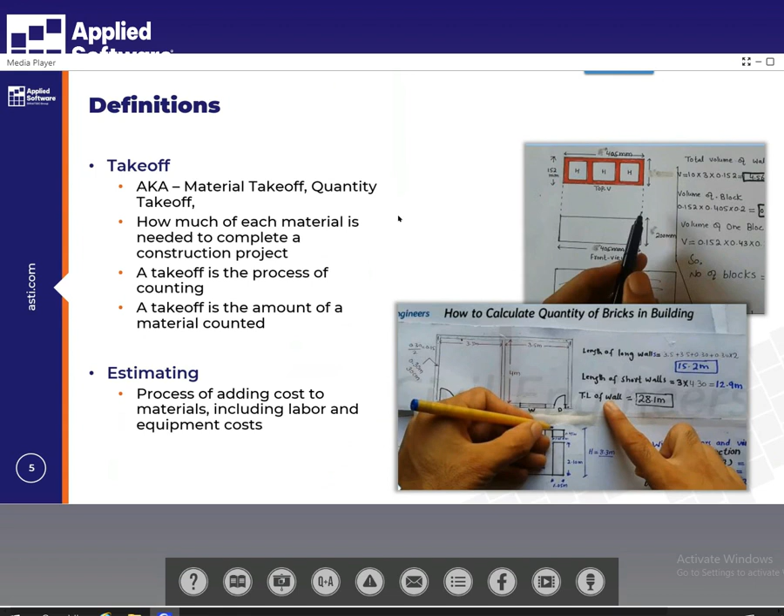But with Autodesk Takeoff, we are going to be quantifying materials. We are not doing estimates, but we'll be able to take that takeoff and export it out to generate an estimate outside of Autodesk Takeoff.

Who uses Takeoff? Typically, that's your estimators and your contractors. Now, for those teams that are using Revit models, they can get quantities out of Revit, but typically those are your designers and your engineers. They're not doing takeoffs per se.

The Autodesk Takeoff tool is made for estimators and contractors who don't know Revit or CAD, but they're receiving maybe construction documents, possibly even models. And without knowing Revit or CAD, they'll be able to use this tool to get some takeoffs.

Now, in history, the way we've done takeoffs is by hand on paper. We would receive a document and then highlight it with different color markers and highlighters to know what we've already counted. Today, we up it a little bit with PDF documents. With PDF documents, you can color up the PDF with different colored lines and shapes, just to let us know that we've counted the object.

With a model, that's where things start to separate a little bit. With the 3D model, we can actually generate a takeoff based on the objects that have been created in the model. Now, in a typical model of a building, you've got walls, windows, and doors. You've got the concrete pad. You've got the materials that make up the wall, the studs, the insulation, maybe plastic, vapor barrier.

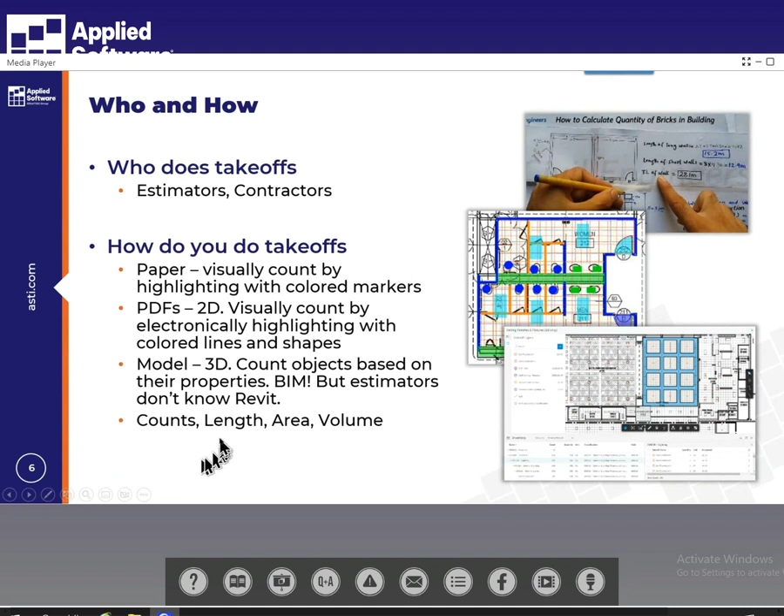If I have a wall and it's this long, but it's made up of metal stud and gypsum wall board, I can calculate just how much metal stud I need and how many gypsum wall panels I need. And so there's formulas to help us calculate that. And we can calculate counts, length, area, and volume, all from our models.

Now, I am going to talk about Takeoff. Takeoff is part of the Autodesk Construction Cloud. You can use Takeoff if you're an estimator or contractor, just for yourself. However, in the grand scheme of things, we want a project where the designers, the engineers, the pre-con, the construction teams are all part of the Autodesk Construction Cloud. And by doing that, it's easy for us to share information and collaborate back and forth.

And so one thing you'll notice here, these are the four main modules, if you will, of the Construction Cloud. We have document management, we have BIM Collaborate and BIM Collaborate Pro, Takeoff, and we have Build. And what you'll notice is that the Collaborate tools, Takeoff and Build, all have access to Docs.

So if the design team is working with Docs, they've had the models here or their CAD drawings. That's accessible by the designers, the pre-con teams. It's also accessible by the estimators. No need for emailing files back and forth. Setting up permissions and controlling how people access files. Estimators using Takeoff can access whatever files they're given permission to see to start doing takeoffs.

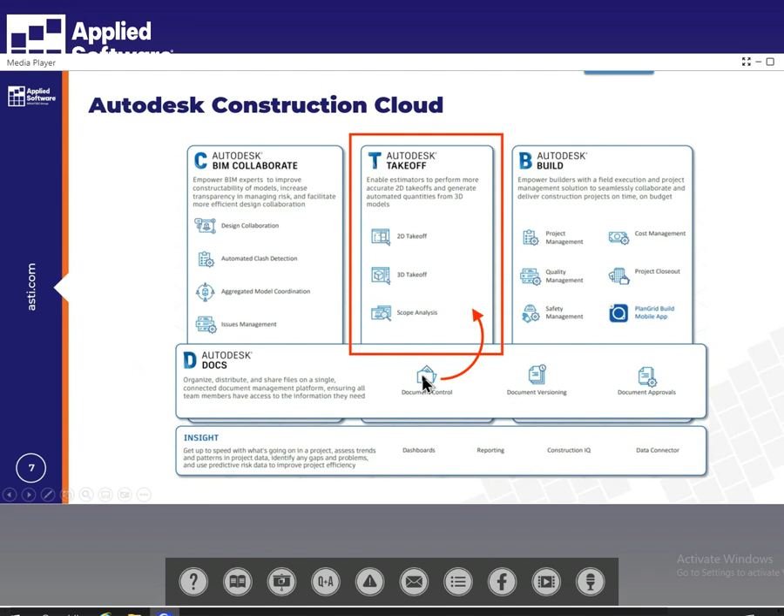So let's talk a little bit about project setup. There's really 8 main points for setting up a project to do takeoff. We're going to log into the Autodesk Construction Cloud. Then from there, we're going to create a project. We're going to invite members to the project. We'll control and we'll set up what people can see and what they can do in the project. Then we'll configure specific settings for Autodesk Takeoff.

Now, once we configure those settings, the next step is to get some drawings or some models to do takeoffs on them. So we can publish 2D files or we can publish a 3D model. And then once I get the files and the models up in the cloud, now I can start creating packages. So I'll create a package specifically for counting, maybe concrete for my structural foundation, my footings. Maybe I'll create a package for counting my electrical fixtures. So I can create a package to help organize what I decide to count.

So once I create my packages, I'll begin with quantity takeoff, and then once I finish counting everything I need to count, I can finish off by exporting out an inventory of everything I counted to a report or to an Excel file, which then can be used by any estimating program out there. So being able to export out to Excel will make it available to any estimating tool and any estimator for use for calculating their estimates.

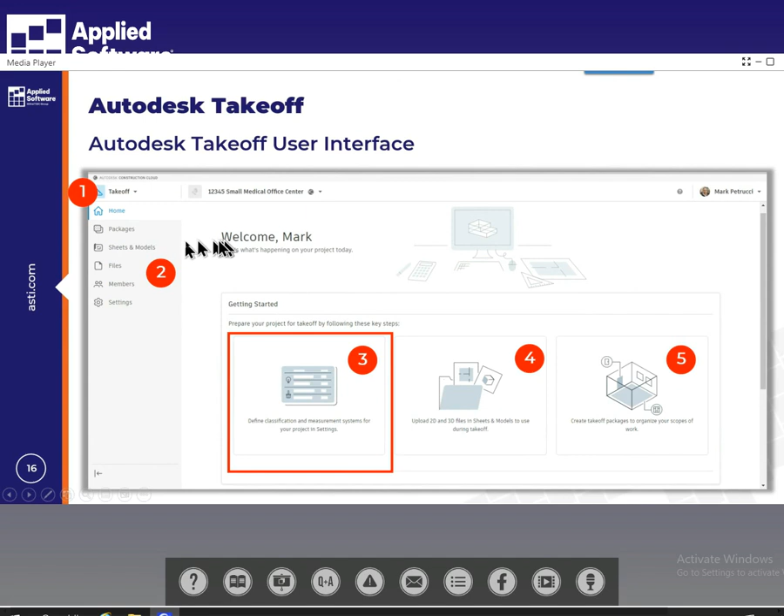So what I'll do is I'm going to first start out with creating a classification system. Now, when I select classification system, it's actually going to switch me over to packages, and it's going to put me into settings. And from here, I decide on how I want to quantify objects using what measurement system, imperial or metric. Well, being in the US, we'll use imperial.

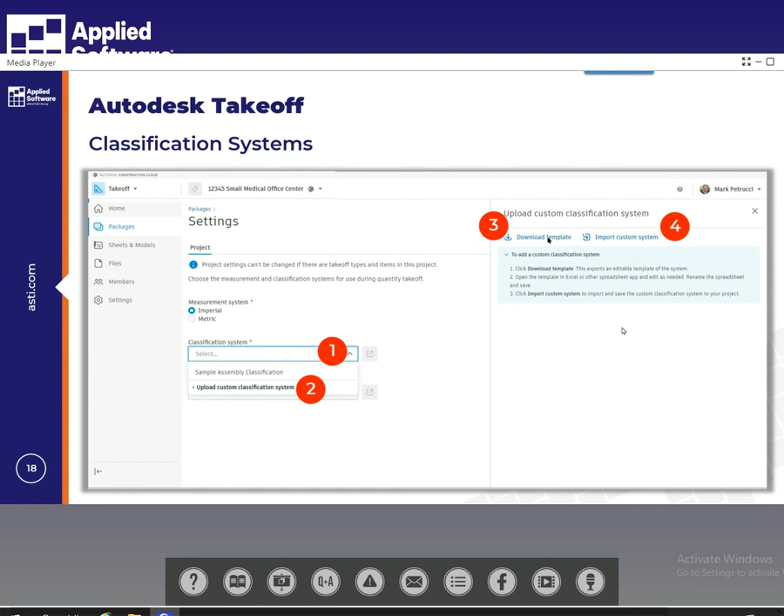Then I want to enter a classification system. By default, takeoff does not have a classification system preloaded, so you need to load one, and it's a matter of simply uploading an Excel spreadsheet. When I select classification system, it says upload, and Autodesk will provide a template file. You can download this template, fill it out, and re-upload it to import your custom classification system. Now, I've already gone ahead and loaded a couple of them here.

Like in this example, I have the uniformat classification system, and you can see it on the right-hand side, set up. A nice feature that could be really helpful for some teams is if you need a second classification system, you do have that option. You don't have to use it, but if you do, when you start doing your quantity takeoffs, you can assign them to 2 different classification systems should you choose.

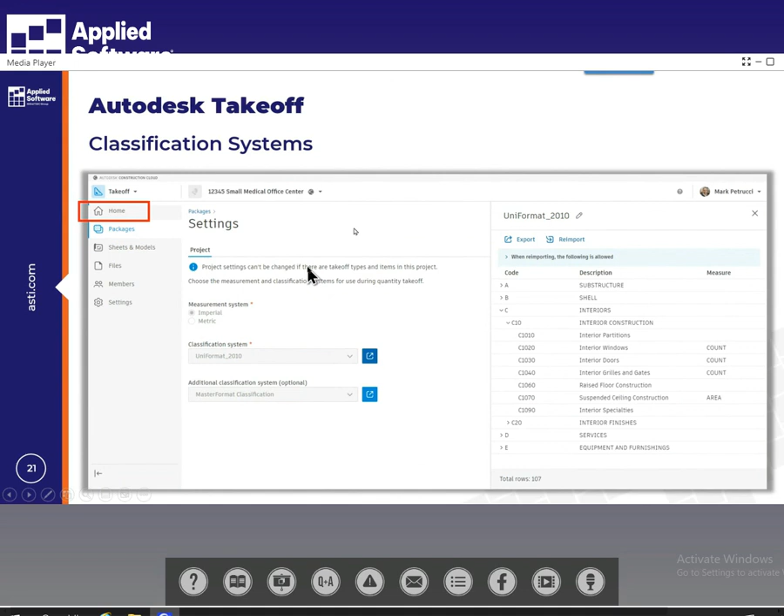So getting back into my classification settings page, now that I've configured this, I'm going to come back over and click on the home button. So now we're going to talk about uploading and publishing 2D sheets. When you click on home, it takes you back and you can see a green checkbox showing you've finished defining the classification system. The next step now is to upload or publish sheets.

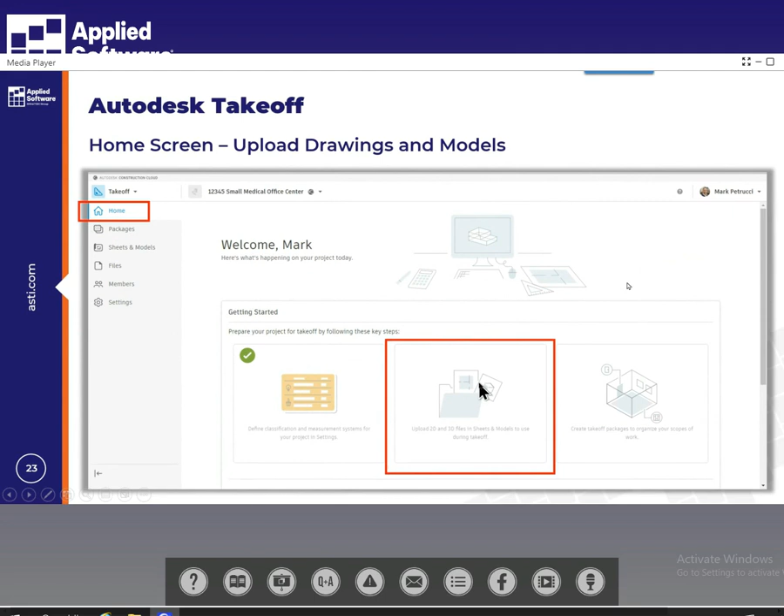Now when I select on this, it's actually going to take me right over to Sheets. So I'll pick on it. Now Sheets and Models is selected. You'll see that I have the option to upload files. When you select the blue button to upload files, it wants you to go select the file somewhere on your computer or maybe on your network. But instead, what we're going to do is take advantage of the Autodesk Construction Cloud.

The Sheets and Models section is what is going to be used by takeoff. This is where all of my takeoffs, my highlighted objects that I'm going to count, will all be performed on anything under Sheets and Models. However, the File section here is taking me back over to Docs. And I have files that I've already uploaded to the Files section. In a perfect world, the designers are working in the File section.

They're working in the Docs section. They have their models up there already. So there's nothing more for you to do, except if you have permission, you go grab a file and say, all right, I'm going to publish it into takeoff. So it will take the files from the file section and pull it into Sheets and Models.

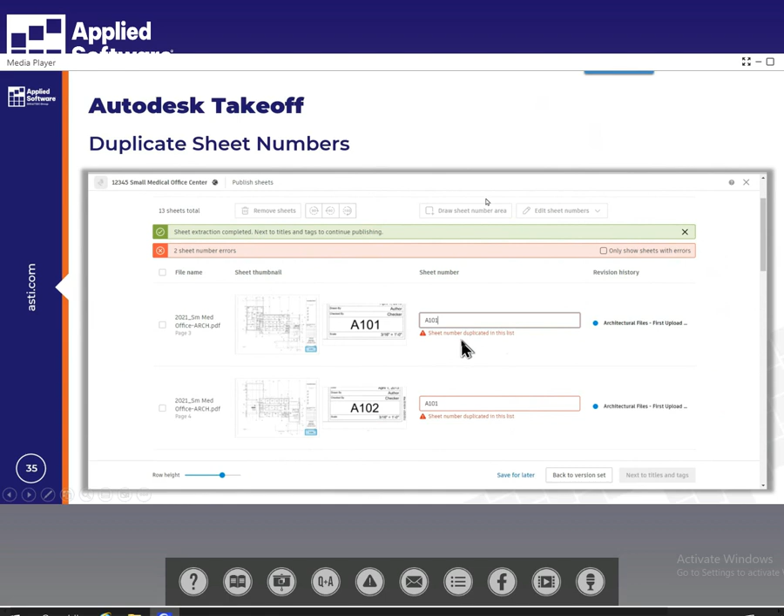It shows me that I've got two sheets, and if necessary, maybe they're spread out, not right next to each other like these two are. You can actually click on this button and it will allow you to filter and sort this list to only show you those sheets with errors.

When there are errors, it will not let you proceed. So this button is grayed out right now.

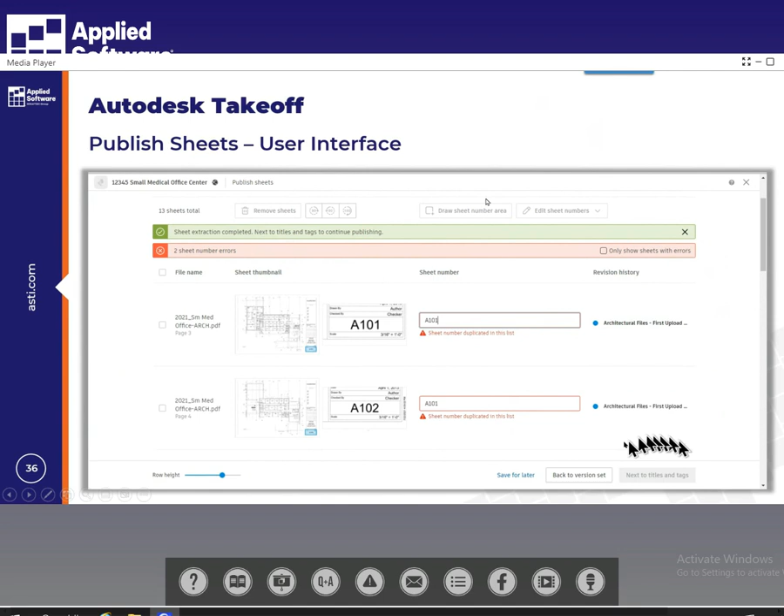If I look at another set of drawings, notice this drawing is simply labeled as I4, and this one down here doesn't have a sheet number, it's missing. That's because in this PDF, somebody put a few sheets in there that just had some 3D renderings. Well, I don't need those for estimating. In that case, I could simply highlight both of those sheets and say remove them.

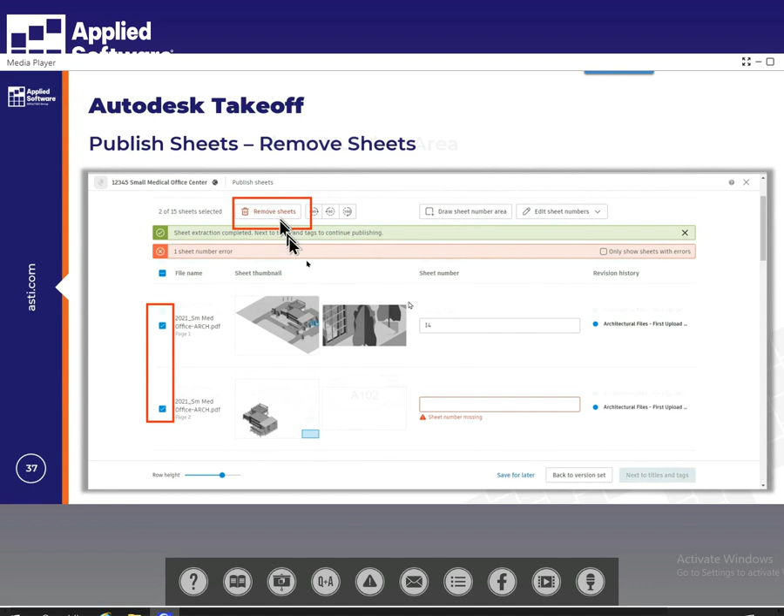Now, if you look right down here, it says next to titles and tags, sheet extraction is completed, next to titles and tags to continue publishing. I usually tell people hold on, because you want to double check, making sure that all the numbers make sense.

For example, notice here this sheet number actually is a date. And for some reason it picked up the middle of the sheet instead of the lower right corner. So that's actually wrong, but the system doesn't know that it's wrong. So it's important that you just kind of proof everything.

To correct it, it's just a matter of selecting on the file and then coming up here and saying draw sheet number area. You're going to tell it where to find the sheet number.

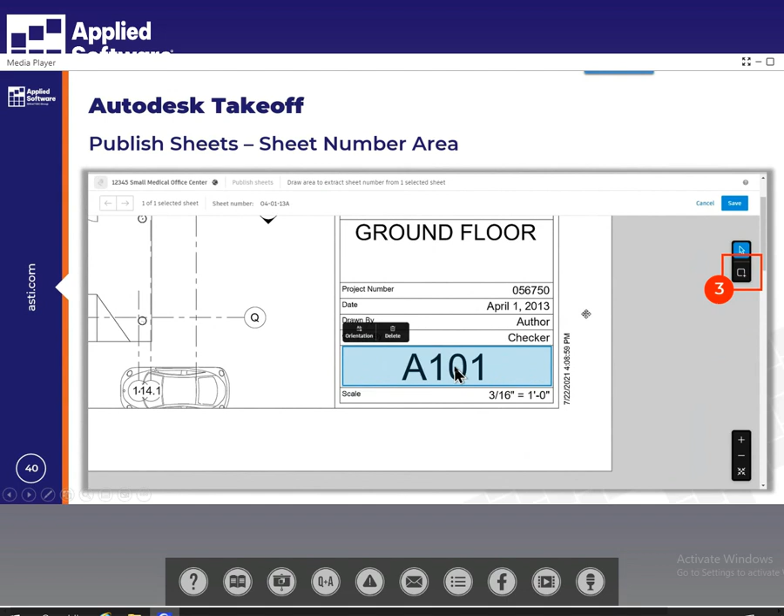When I select on that, it'll open up a window. I'm just going to quickly jump through here and select this button, which says define the sheet number area. So I'll zoom in, and I will simply, with this tool, draw a rectangle to include the sheet number. Then when I hit save, it will kick me back out.

It'll spend about 10 seconds scanning, and then it'll put in the correct sheet number for me.

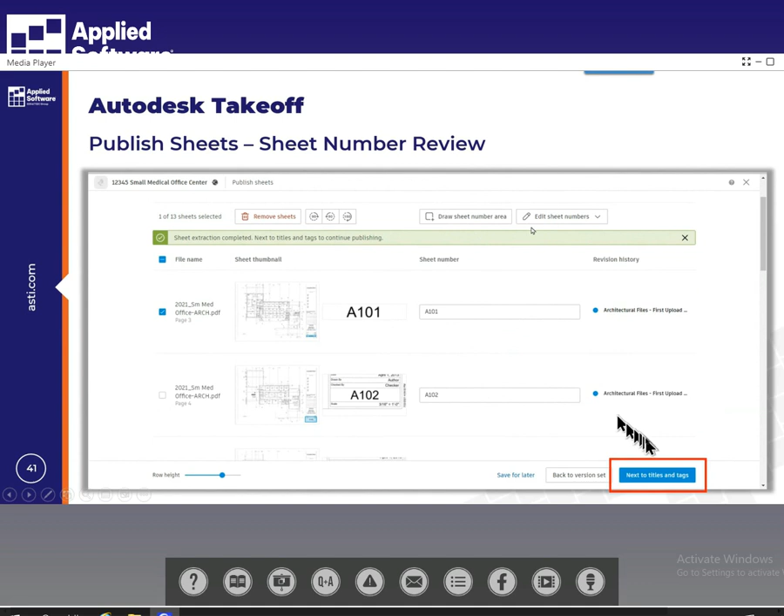Now I'll proceed on to titles and tags. Sometimes it'll pick up the sheet title, sometimes it misses it. First thing I would do is right down here, adjust the row height.

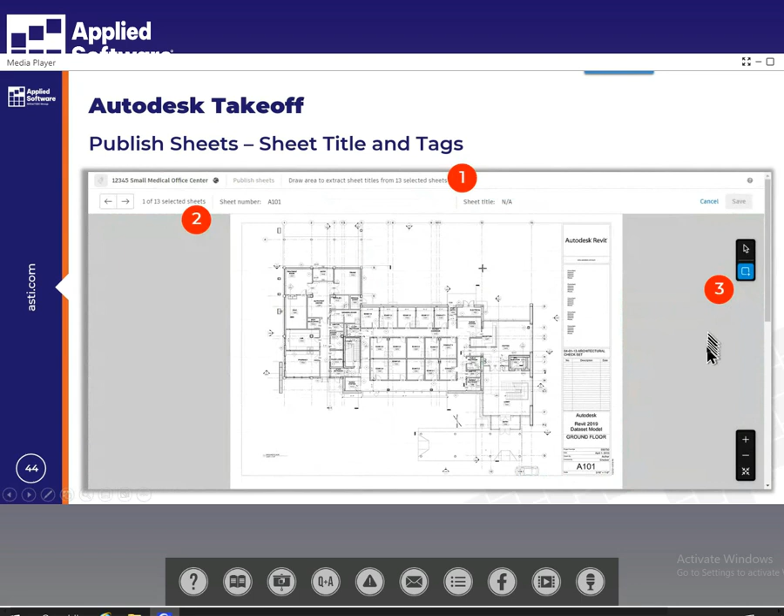If you slide this bar over, you can see 4 or 5 different sheets on the screen. Then you can select all of them and select the button that says draw sheet title area. Just like we did the sheet number before, I'm going to use this button right here to come in and define what the title is, and then I'll save it.

And now it went through and scanned all my sheets, and now I can come over here and hit Publish Sheets. I purposely wanted to do this in the PowerPoint because when you publish the sheets, depending on the number there are, that's where it could take the most amount of time. It might be just a couple minutes, or it could be maybe 5 or 10 minutes, all depending on the number of sheets. But then you end up with a list of all the sheets that you can start using for takeoff.

As far as uploading and publishing a 3D model, that's pretty easy. We'll come over here to 3D models, come over to files, select your Revit models, and I could select multiple ones, select publish, and right now those models have been published from docs over here into takeoff. So I can do whatever I want with the models here. I'm not affecting the models that are over within the docs, Autodesk document management.

And finally, the last step is to create a package. You'll notice the green checkbox, I've now finished uploading files. So the next step here is to create some packages. I've got some packages already created, but I'll go through some steps to show you how they work and then how we can take advantage of the packages. So let's jump over into a live demo.

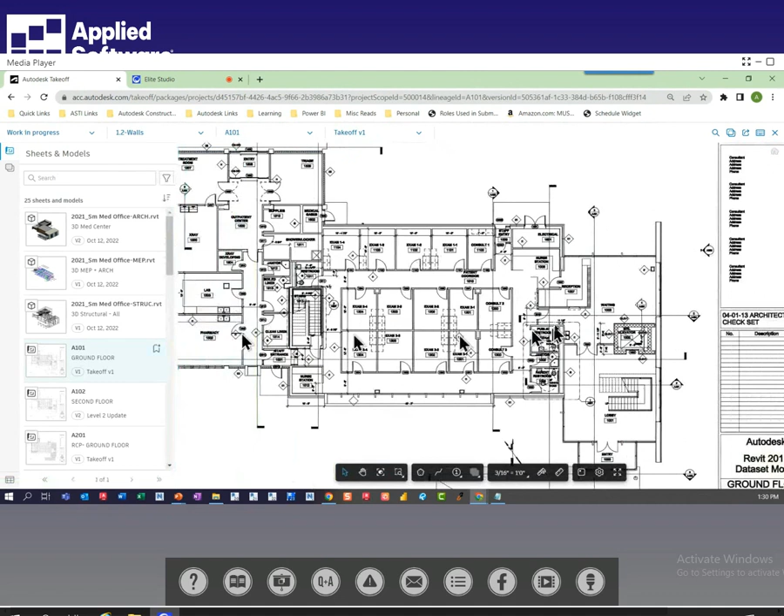Let's do a wall takeoff. And I'm going to start with the ground floor here. I'll select it, and you'll see here on the right-hand side a floor plan of a 2D sheet. So we'll first do a 2D takeoff. Now, for me to proceed with the takeoff, on the left-hand side, I'm going to click on this icon, which takes me over to takeoff types. So I want to count some walls here. I want to do a linear takeoff on my walls.

So you'll notice I don't have any takeoff types here, but it does tell me, click the plus button to get started. So if I select on this, I'll give this a name, I'll just call this interior walls. And I can decide, do I want to do an area takeoff, a linear takeoff, a count, or a BIM takeoff? Well, this is a floor plan, so I'll do linear. I can select the color that I want to use. I'll pick this. I can specify the line width.

And I can put in a description. Maybe I describe what this wall is: 3 5/8 metal stud with insulation and 5/8 inch gypsum wallboard on both sides. Primary output. Now I decide on how I want to organize this when I count it, and what do I want to call this when I export it? So I'll put it in here. I'll just say my wall name here. And then I'll pick a classification system.

And if you know your classification systems, you can scroll down and click on it. But in this case, I'm going to type in the word wall. And I'll look to see I've got standard foundations, wall foundations. Scroll down a little bit more. I've got exterior wall veneer. Okay, I've got my wall finishes. Actually, I'm just going to type in the word partition because I know that one will limit it. Partition. There we go. And I'm going to use the C1010 classification system for interior walls.

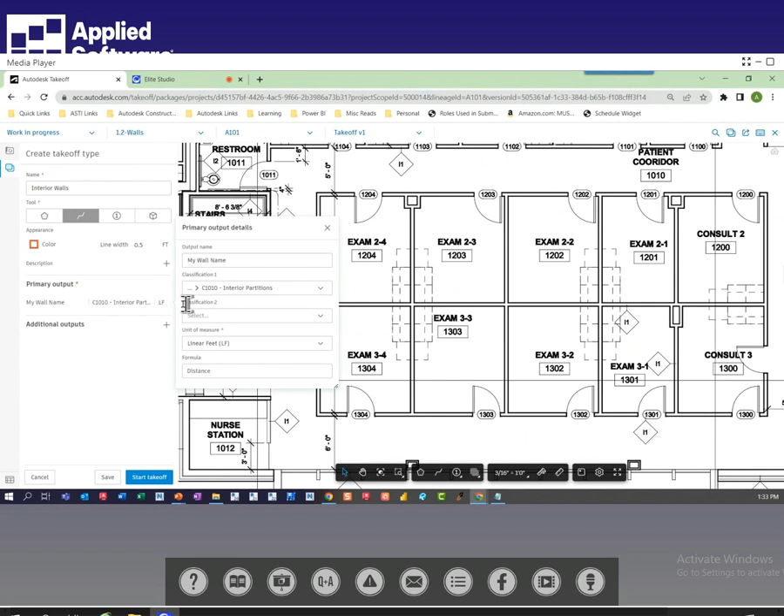And then I can decide on how I want to count it. Do I want to count the number of walls? It probably makes more sense to do the linear feet. And then the formula is going to be based on whatever the distance is when I draw the line. Now that I've defined the classification system, I could hit start takeoff. And now it's just a matter of left clicking, dragging my mouse down, and you'll notice it says right here 24 feet, 9 3/4, which converts into 24.81 linear feet. And if I continue and just drag it down here, I can do my takeoffs.

Obviously creating these takeoff types is a bit time consuming. So normally what I recommend is to create a template project where you have all these takeoff types already preset. So for example, let's go ahead and delete this. And this time I'm going to use this option that says import takeoff types. And it says project. Now, Autodesk has not yet configured it where you can have a pure template for takeoffs. But what I did was I created a project. I simply called it 000 takeoff template, so it always shows up at the very top of my list.

Then I go to takeoff packages, and I've got a section in here called walls. In this package called walls, I created a bunch of takeoff types, and you'll see them all listed here. So now I can say, let's bring them all in. Now, before I do that, I do want to point out what may be helpful with the naming convention.

Instead of calling it interior wall or 3 5/8 metal stud wall, name it something very generic, and as you read from left to right, get more specific. So I'm going to say wall interior 3 5/8 metal stud, gypsum both sides. Now you'll notice I've got one here which just shows a line, and this one shows a cube. I need one for my 2D takeoffs, and then I need one for my 3D takeoffs. And that's why you see it.

It looks like it's almost duplicated, but they are different. Now they could have the exact same name, by the way, but you can see by the symbol whether it's linear or whether it's a BIM takeoff. But notice all my interior walls are grouped together. All of my exterior walls are grouped together.

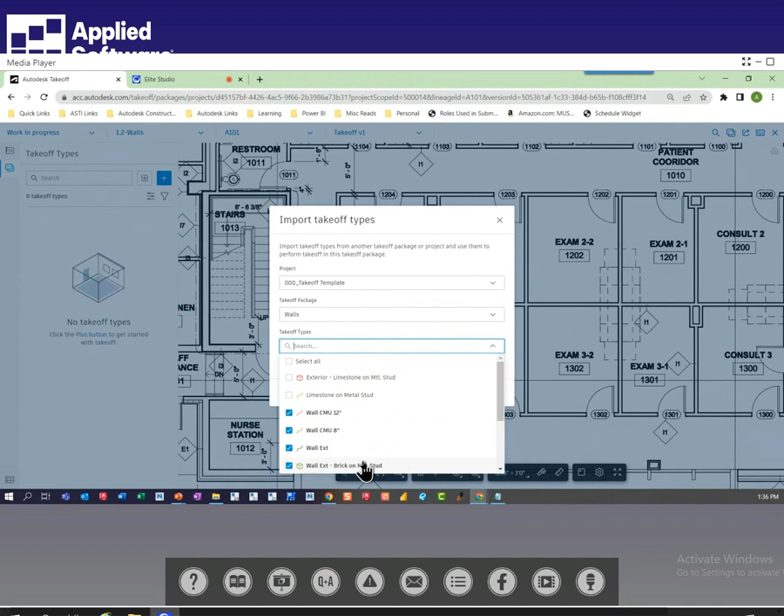The better bet is to rename those to start with the word wall. And if it's going to be exterior, put EXT and so on. So I'm not going to bother bringing those in, but I'll bring in those 6 and I'll hit import.

Now to do my takeoffs, it's just a matter of selecting the right wall. So if I select my interior stud, wall interior 3 5/8 metal stud, all I have to do is just click here, and I'm counting my metal stud. And I'll come back around here, and I'll go ahead and do this. And I'll just hit enter, and that quick I'm able to do some takeoffs. I've got 137 linear feet of interior metal stud walls.

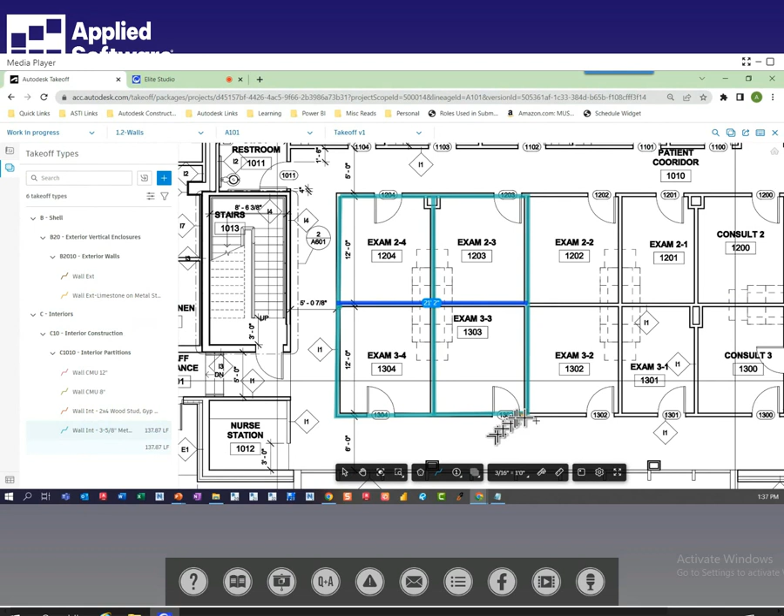Well, what if I pick the wall interior, let's go ahead and compress this. What if I pick this wall right here, which says wall interior 2x4 wood stud? When I click on it, it's actually going to count the number of sheets of gypsum wallboard I need, how many wall studs, how many top plates, how many bottom plates. So I've actually got it configured to break up that wall. Instead of simply calling it a wall, now I can break it up into its different pieces and parts.

And I'll show you the formula here in a minute, but I'm going to draw one wall. So to do a takeoff, you highlight it so it turns blue. Once it's blue, you simply come over here, left click, drag your mouse down, and let go. And if you notice, it calculated I needed gypsum wallboard. It says 24.86 linear feet. That doesn't make sense. It should be a count, so I need to fix that.

Right here, my bad, this is the entire wall. My bad, right down here. Gypsum wallboard, 4x8 sheets. It can't calculate the number of sheets because something is missing, and I'll show that to you in just a second. But it did calculate the number of studs. It calculated the linear feet of my top plate and my bottom plate.

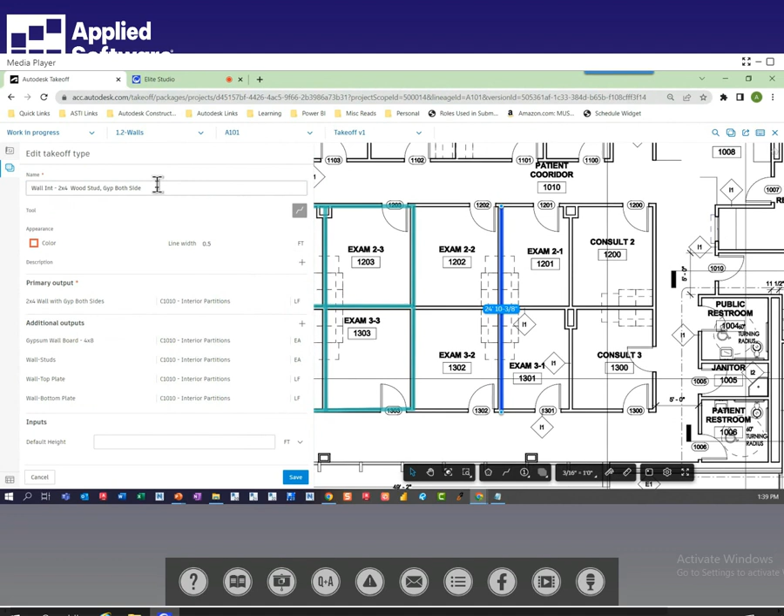So here's the name of my wall. Here's the color, the primary output. Okay, this is the name that I wanted to call it. In other words, I dropped off wall interior. I just have it call it 2x4 with gypsum both sides. But then down here is where I'm doing the calculations to calculate the amount of material.

If I click on gypsum wallboard, I first gave this a name. That's what you see here. Then I specified the classifications where I want it classified. I specified a count. I wanted to count the number of sheets. And then I put in the formula: distance times height divided by 32. A 4 by 8 sheet is 32 square feet, so I divide it by 32. And then since I want wallboard on both sides, I said times 2.

What's missing here is the height. I have to specify what the height of the wall is. So I'll put in 10 feet for the height of the wall. When I do my other takeoffs, now it will be able to calculate the correct height of the wall.

For my wall studs, here's the formula: distance divided by 1.33 plus 1. Where did I get these formulas? I just Googled it. Other companies can have their own formulas. So you can put in the formulas however you want, but these are some typical formulas that I found.

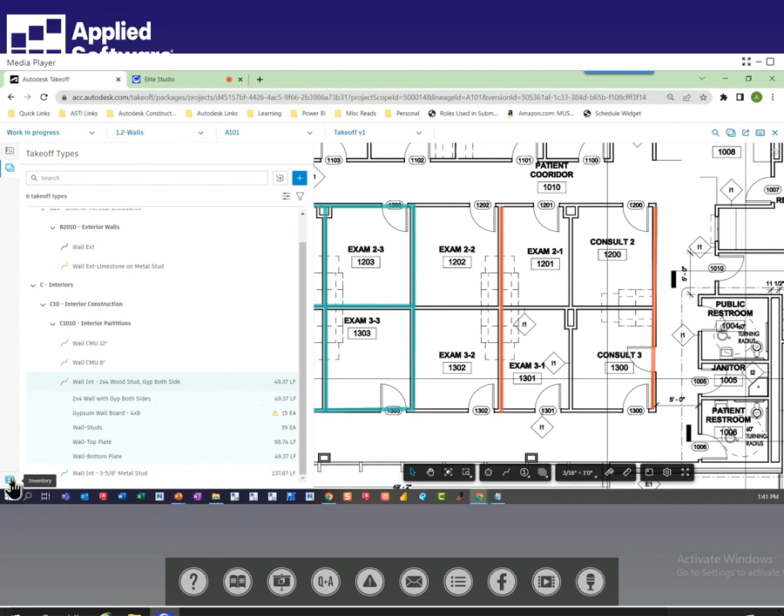Now, I could delete this and redo it, but I do want to show you what they put here for a message on what to do. It says: can't calculate, use inventory or detailed takeoff mode to enter the required inputs. Well, notice right down here it says inventory. I'm going to pick that, and I'm going to maximize this to fill up the screen.

So here's my classification system. I'll go to C10 Interior, then C1010, and here are my walls that I put in. Here's the one that has the errors. I'm going to click on it, and if you notice, it's having problems calculating the quantity here.

If I select that, now it's showing me I've counted that wall twice, but this one's missing the wall height. So I can put in a wall height here, 10 feet, or maybe 8 feet, or a different wall height. Notice the quantities change. I change that to 12 feet, and now I need 19 sheets. So you can make adjustments here in the inventory. Now when I go back in here, you'll notice I need 28 sheets of gypsum wallboard.

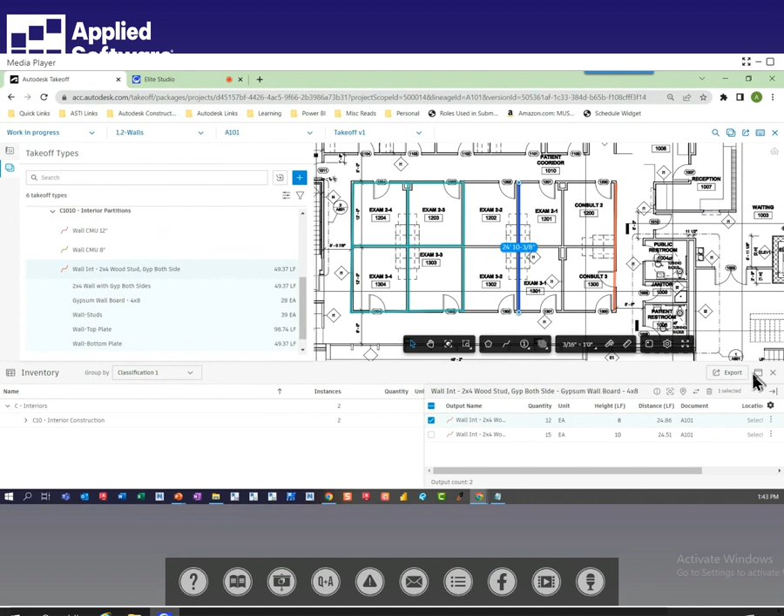Now, you may say, Mark, we've got Excel formulas, so as long as we get the length of the wall, we will use our Excel formulas to calculate the amount of gypsum wallboard and the number of studs. Fine, you can do that. But if you want the system to do it for you, you have that option too. It's optional how you want to do that. But the point is, I am able to get some pretty detailed takeoffs here within the 2D mode. Okay.

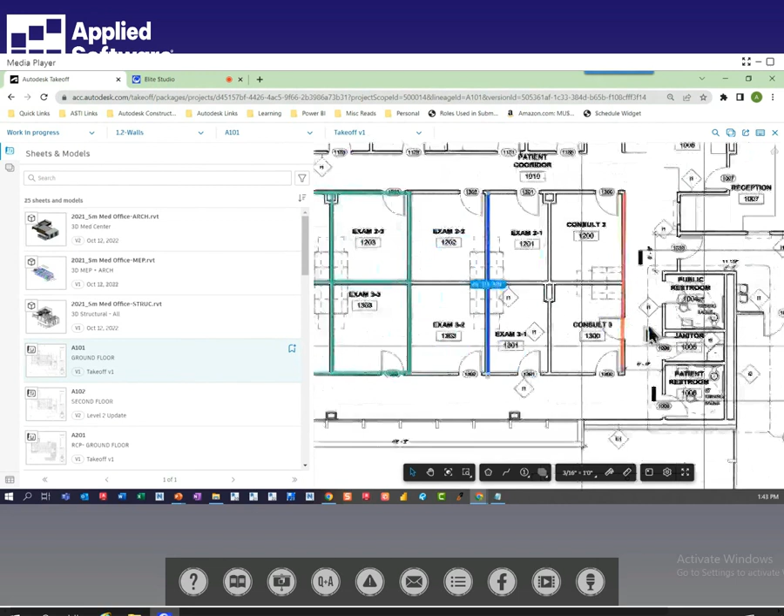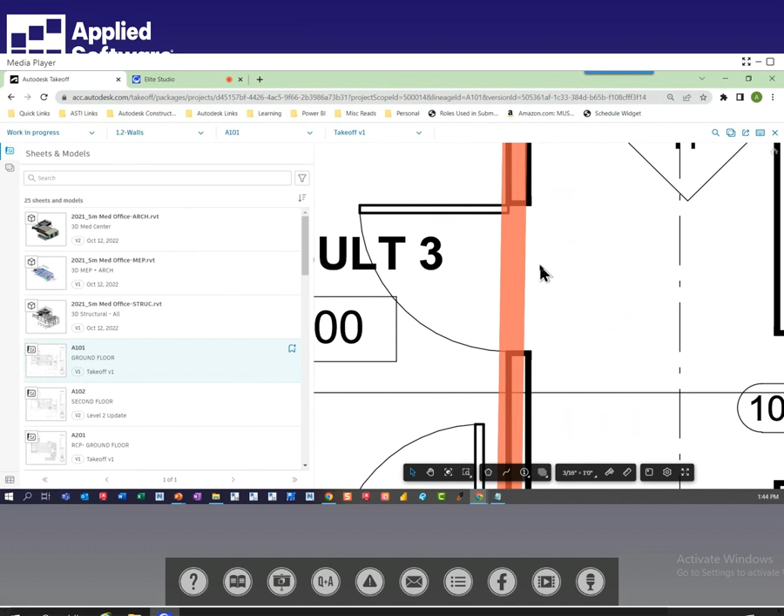I'm going to come back up here to Sheets and Models, and let me show you how we might do that in 3D. Now, one thing worth mentioning: I did a wall takeoff, but I have a door opening. My formula does not calculate based on any openings right now. Obviously, with a door, you need a couple extra 2x4s on both sides and a header above it. So there are additional calculations I have to add to my 2D takeoff so it can calculate the quantities properly.

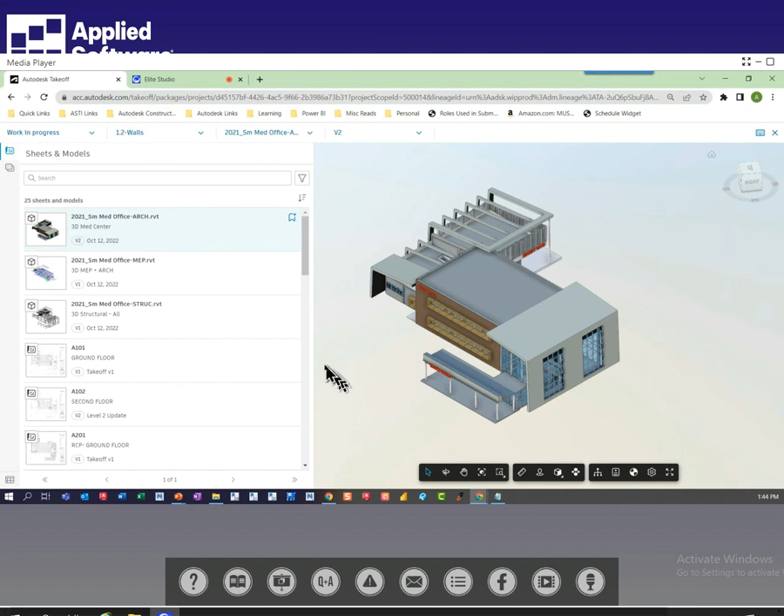But if I go over into a 3D model, the 3D model has a level of intelligence. Remember in 2D, I had to tell it how tall the wall was, and I'm going to have walls of various heights. Well, in the model, they should be the correct heights. So I'm currently looking at a 3D Revit model. This Revit model was used to produce those 2D sheets, by the way.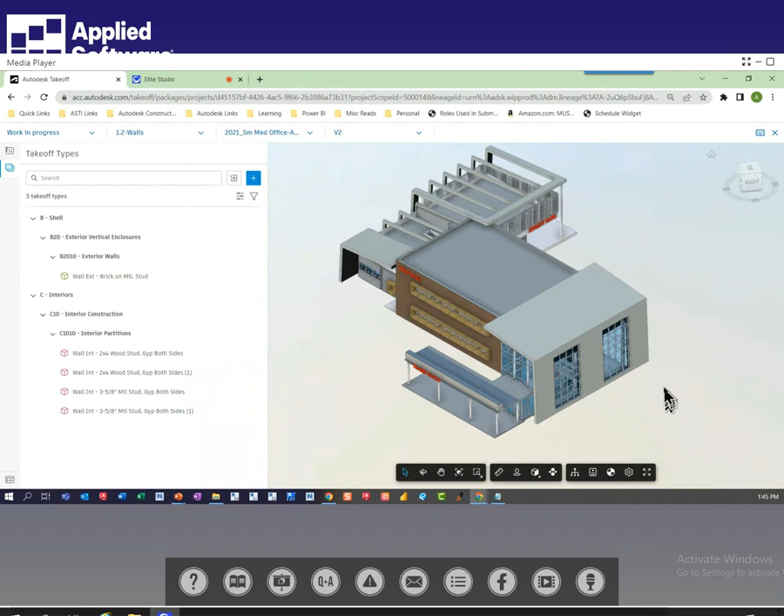If I decide to do a takeoff here, it's just a matter of coming down here and saying, all right, I want to count my interior walls. Now, one way to do it is to come in here and start hiding objects until I can get to the walls that I want to count. But that can be really tedious.

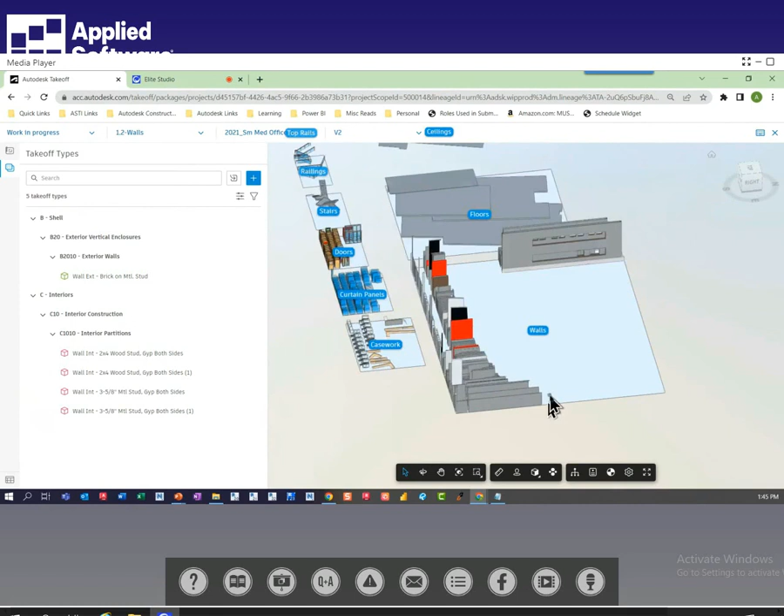Right down here, we've got this button that says Form Clusters. When I click on that, it breaks the model up into different categories, and right down here are all my walls. So if I touch a wall, right click, and look at its properties, it tells me some information about that wall. That is a metal stud wall, 3 5/8, 5/8 gyp on both sides. Total width is 4 7/8.

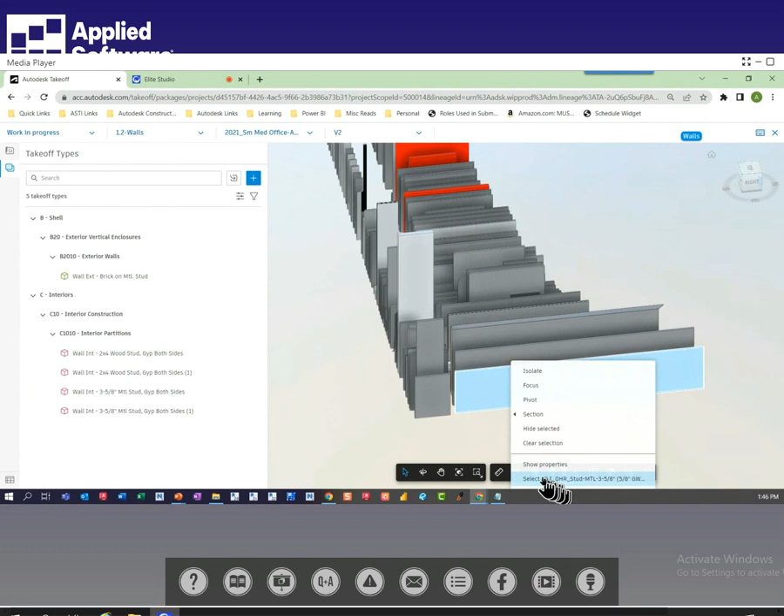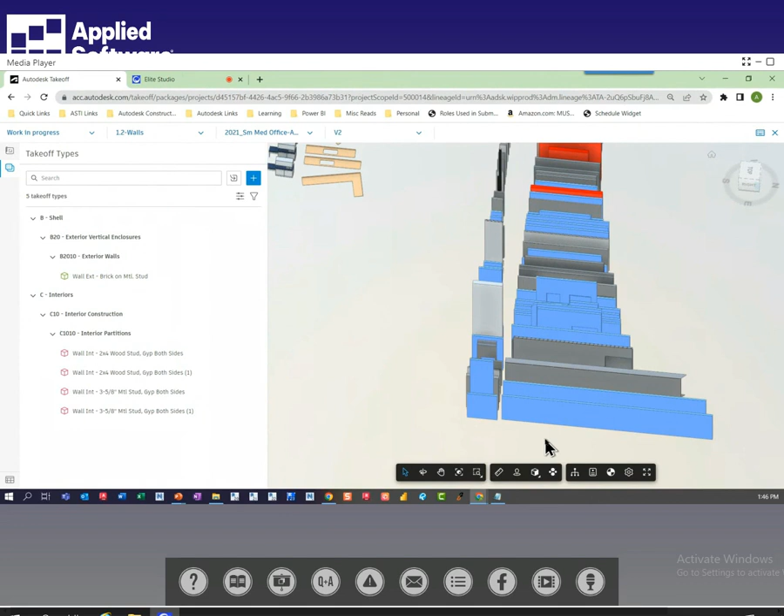Well, if I right click on it, I can come down here and I could say select all. When I do that, this wall is used throughout my project. And if I take a look right now, let's rotate this a little bit. There's openings for my doors and windows in those walls. So I can get some pretty accurate calculations, at least for wall area, to help me determine, or use formulas to help me determine number of studs, amount of insulation, amount of vapor barrier.

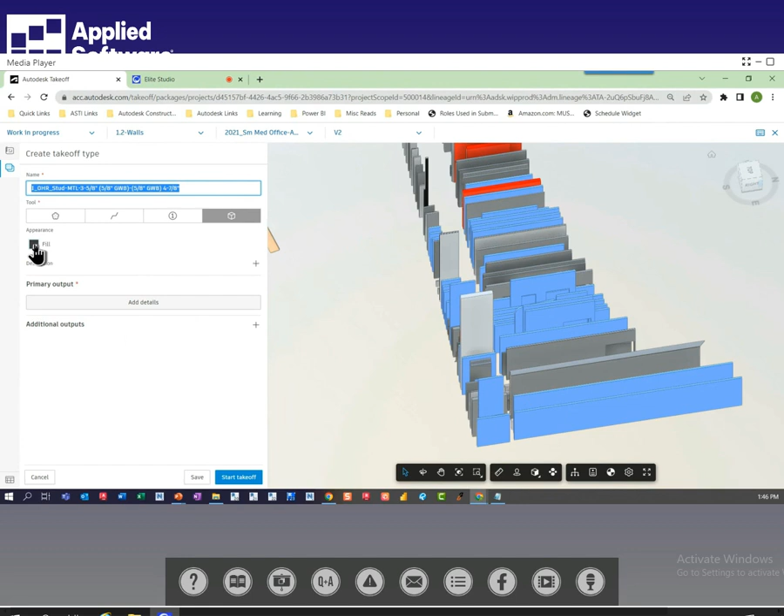But all of those walls right now I've selected. Now I want to count them. So I'll come up here and I'll hit plus. And notice right here, it automatically knows the name of that wall. I'm going to say, all right, and it automatically selected as BIM. Okay, whenever you count that wall, change that color to orange. And then I have to come in here and I have to specify the primary output name, classification. I'll do C1010. C1010. There we go. And I'll hit start takeoff.

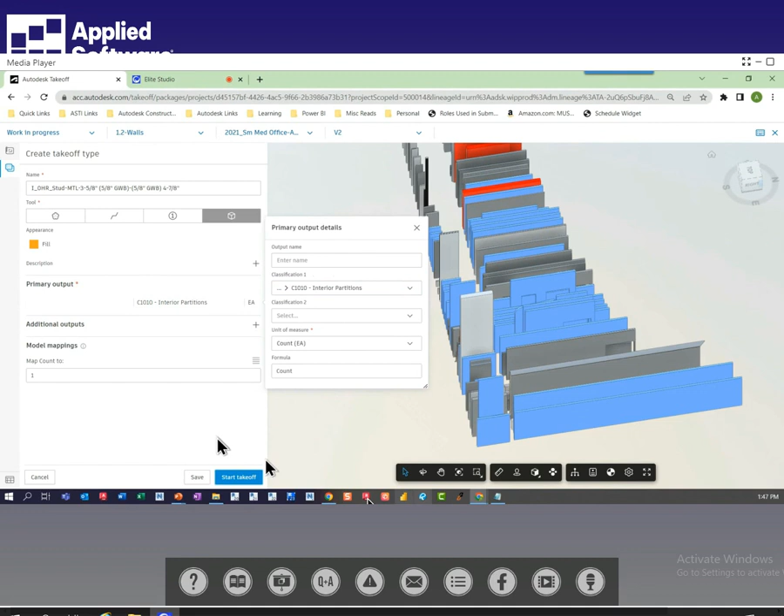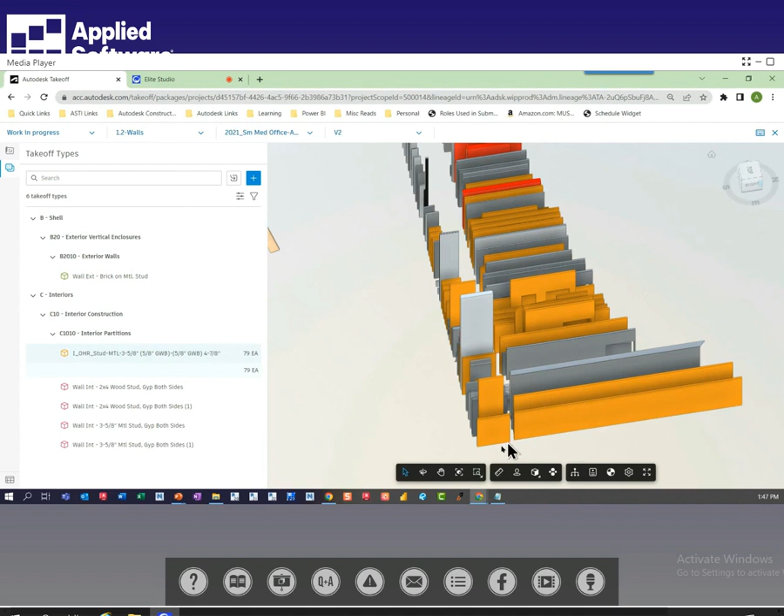Oops, I forgot to finish something. Select, click on it, right click, select all. And then I have to, it's found 79, but I forgot to hit the blue check box. I'll hit the blue check box. And now you'll see all those orange walls are walls that I've counted. And you can see there is a total of 79 of them. And the name of it is the same thing it was called inside the Revit model.

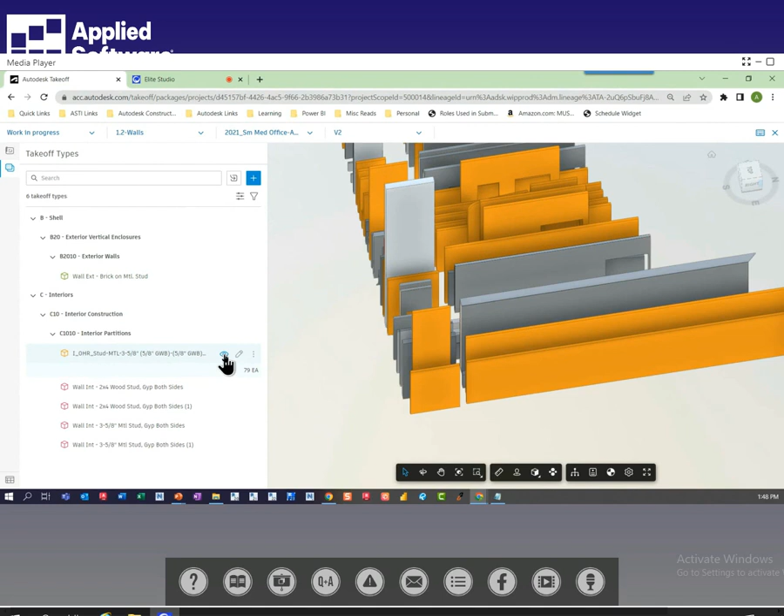Now, I could go through and just keep picking walls that I've already counted, but what I could do, these orange walls are kind of in the way. Come over here and hit the little eyeball, and now they disappear. So basically, as you start going through and counting objects, and I'll pick this, and I'll count it, it will disappear as I start counting it. So it makes it much easier for me to do my takeoffs.

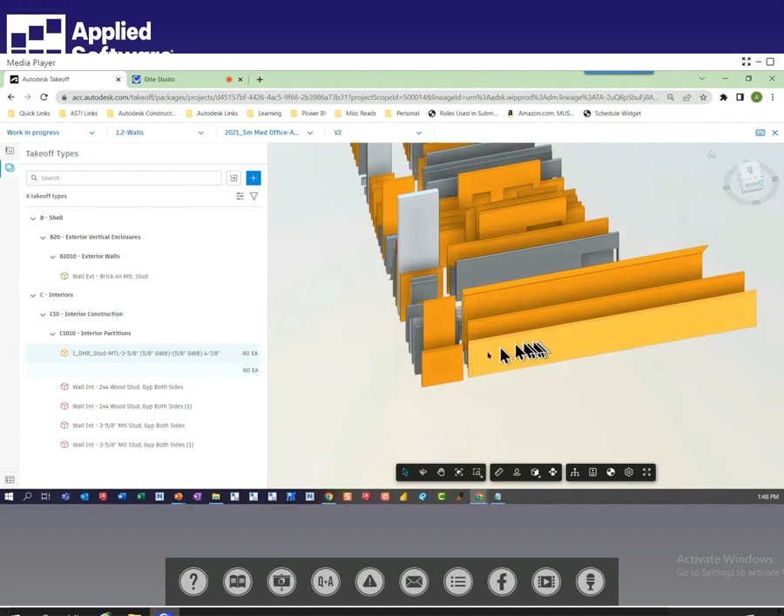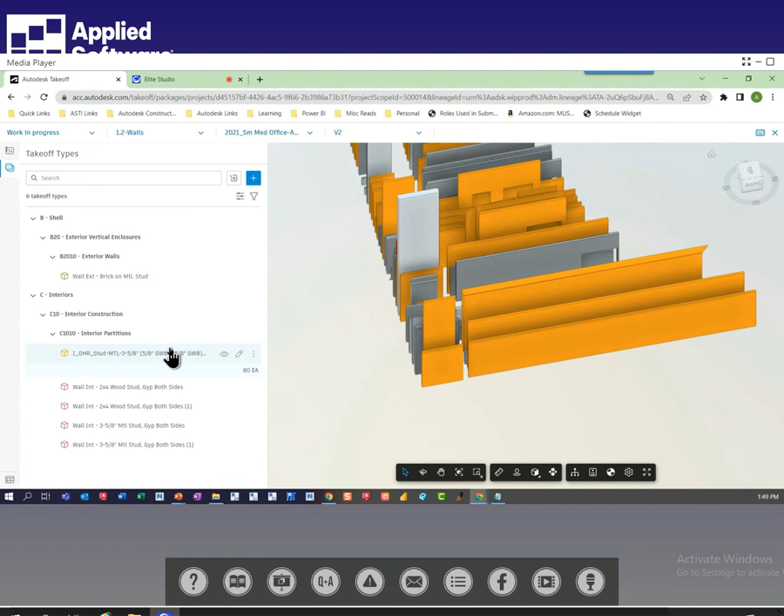Now, I'm going to go ahead and turn that back on because let's just say I want to calculate this wall. I use the exact same name it was called by whoever the Revit designer was. But I don't need it called this. I'm just simply going to call it wall interiors metal stud both sides. Now, I can't remember. Let me look. Yeah. So notice this one is calculating the gypsum wall board, the amount of metal studs, metal top plate, bottom plate. So what I could do is simply reassign these from this object takeoff name to this one.

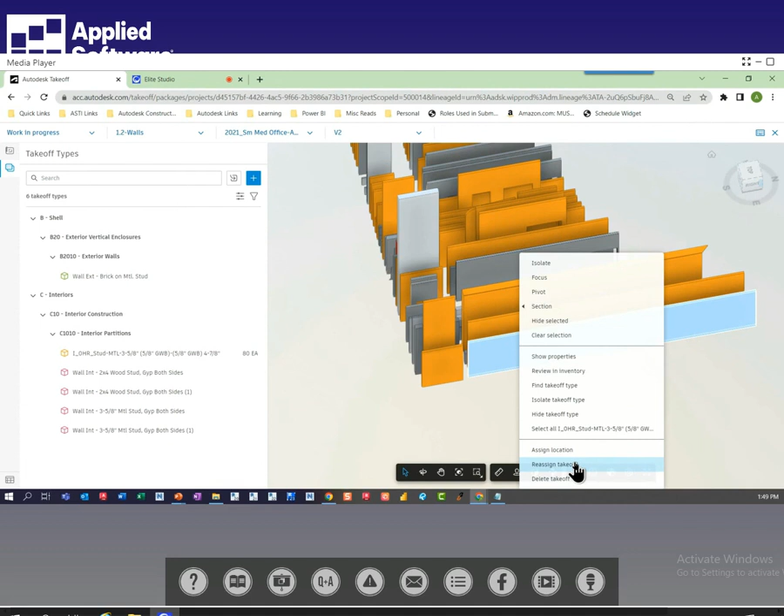What I'll do is I'll come in here and I'll select this and I'll say reassign takeoff. I could also right click and say select, where is it here? Reassign, here's reassign takeoff. I can do it from here as well. But I'm going to do it right from here. I'm going to grab all of them. So what I'll do is I'll click the three little dots. I'll say reassign takeoff. And instead, I'm going to use this wall interior 3 5/8 metal stud. And I'll say reassign.

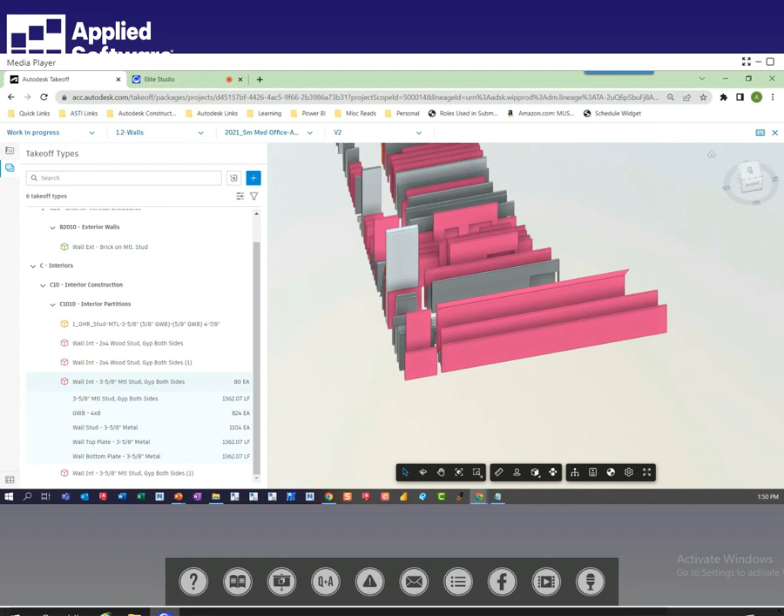Now you notice the color changes. And right down here now, it's counted 80. And if I click on it, I can actually see how many gypsum wall boards I need, wall studs, top plate, bottom plate, all based on the formulas in which I've put in there. So I won't do any more takeoffs, but very easy to do the manual takeoffs.

Let's just look at the report that gets generated, and we'll see that, and then we'll be done at least for today. So come back in here. I'll select my inventory. I'll maximize this. I'll do this first by document, because you can see right here, I've counted walls in my Revit model, and I've counted walls on individual sheets. And I'm counting the same information, metal studs and gypsum wall board, top plate, bottom plate. So I can sort it by document.

I can do it simply by takeoff type. So now I'm quantifying all of my wood studs, all my metal studs. And then here's another third type. I can do it by classification, which I only have one here. And then I can do it by location, which I have not used location, but if I did, I can sort that by location as well.

But now it's just a matter of exporting, and I'm going to do this by takeoff type. I'll select export. This will generate an Excel spreadsheet that gets downloaded, and should be right here. And so now I'm going to have all my quantities that, oops, right here. Sorry.

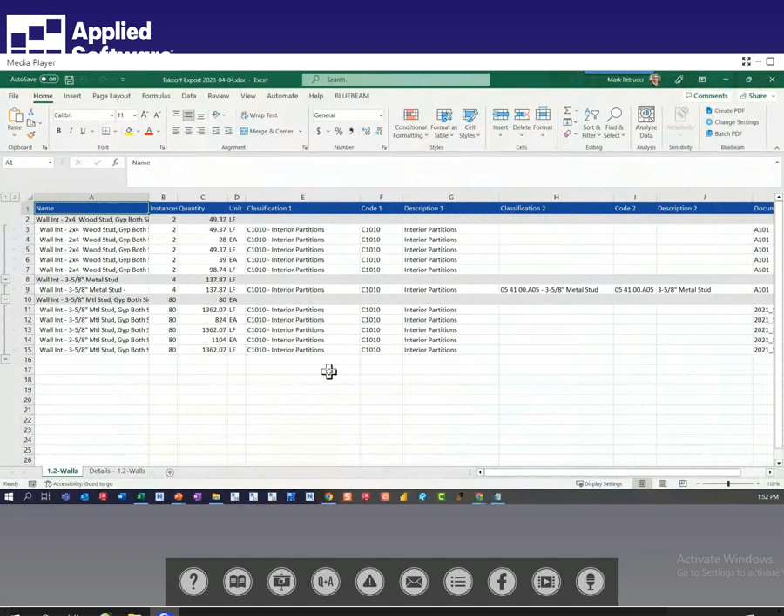Boom. All my quantities that I've calculated in the project, and if needed, I can see every single object that I've counted, and if needed, I can take this and link it to my estimating program to start generating my estimates. So, for the most part, that's what I wanted to cover for you, that we can do both 2D and 3D takeoffs on your sheets and models.

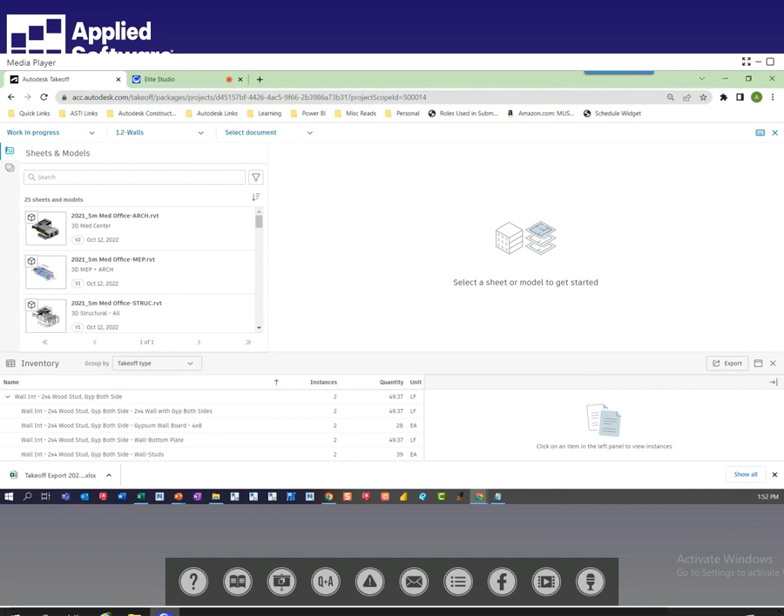So, hey, you know what? I think one of my most common questions that I ask experts, and maybe it's a played out question, but I think it's great to start the conversation. Whenever you have training on this with clients, what is kind of like the number one question that you get asked? Yeah, usually the number one question is, can we create a template? So we don't have an official template, but we can create a project and make that a template.

Next question I usually get deals with, how do we work with teams when they don't want to provide us the Revit model? Because doing a takeoff on a Revit model is so much easier. If there's one available, then I would definitely reach out to the teams that are creating the Revit model. Let them know that you want to do takeoffs. There could be paperwork that needs to get signed that says they're not responsible for any inaccuracies and stuff like that. But what's interesting is they're using that model to generate the 2D sheets. So it only makes sense for them to provide you the Revit model.

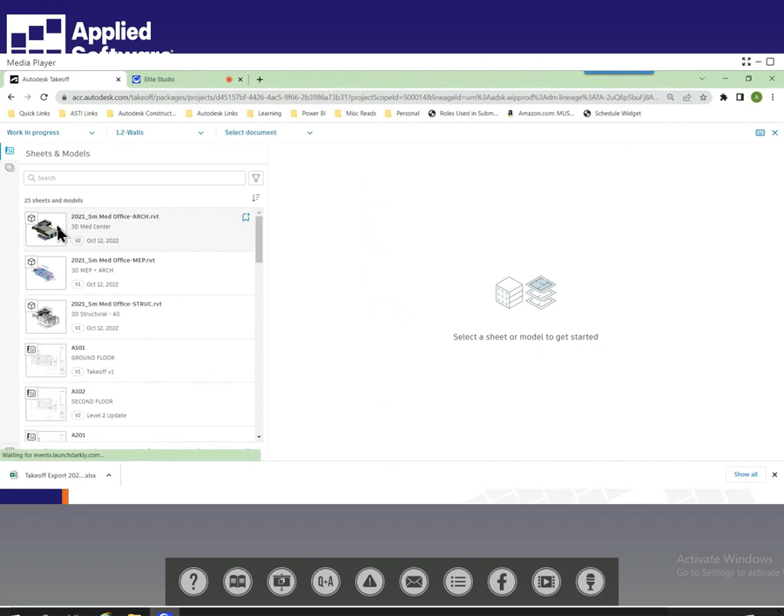There is one other thing I was going to mention here real quick. Sometimes people feel that it takes a little longer to do a takeoff or get it set up. But what I want to show you is an advantage, and this is a good example here. It's not uncommon that when architects are modeling walls, this architect did happen to make the walls go 6 inches above the ceiling. It's not uncommon where they just draw a wall that goes to the ceiling or to the very deck above it, which may not be correct in the model, but from a floor plan view, it looks the same.

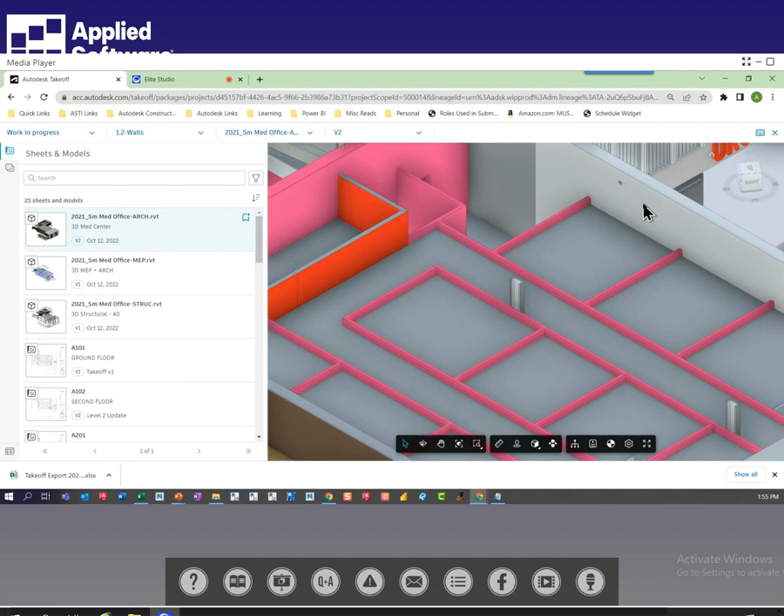In this case, I can get my takeoffs really quick, and part of all the time that I saved I could use to review the Revit model. And if I came in here and I saw that this wall was much higher than the rest, I would kind of question it and say, all right, was that a mistake? Was that on purpose? Should all the other walls be taller? You know, maybe this is a security room, a storage room, that these walls should go to deck.

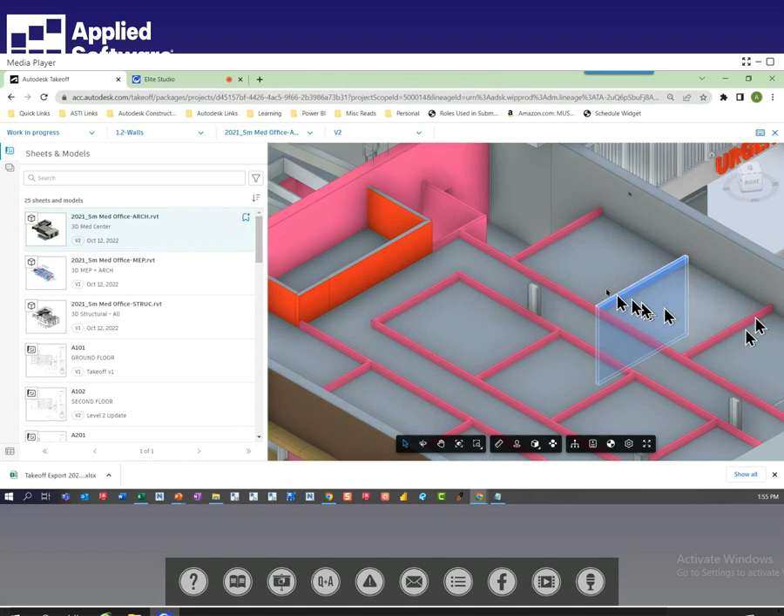You can review the models for accuracy, that you can then update your takeoff or contact the designer to say, hey, there's a discrepancy on your floor plan. It shows this. Here in the 3D model, it looks like this. They don't quite match up. Let's make sure that the model's correct. So that's just something that I want to mention, is that we can save time on the takeoff part using Revit, which then we can use to help verify the accuracy of the takeoffs that we have produced.